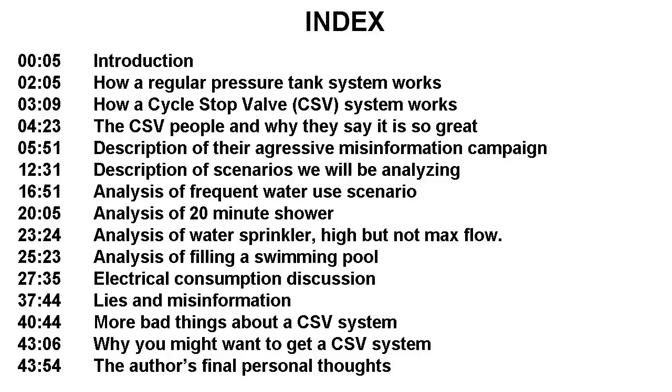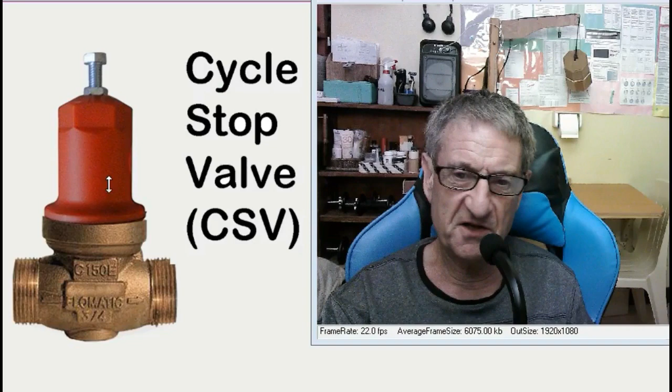This is a piece of equipment that's supposed to go in your pressure tank system. When you have a water system that has a pressure tank and a pump, you're supposed to put this valve in, and it's supposed to help you in many ways. It's supposed to even out the pressure, reduce the number of cycles that the pump goes on and off, save you electricity, save you money, wear and tear on the pump, etc. If you look at the advertising for this product, they make it out like there's no downside to this product and that it's the greatest thing since sliced bread. There's only one problem: this is actually a bad product. It really doesn't do any of the things they say it does.

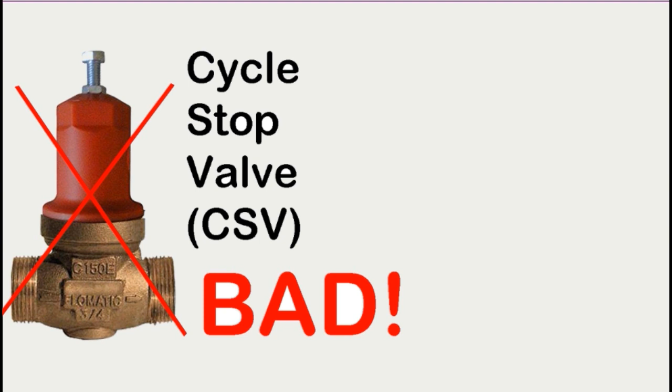The information they give is very misleading, and I'm going to prove to you today why it's a bad product. So here's what I'm going to do in this video. First, I'm going to give you a quick overview of what it is and how it works, so that you know what I'm talking about. Then I'm going to tell you what the promoters of this product say it does for you. And then I'm going to show you how they promote this product with both misinformation and disinformation, pretty close to downright lies. Then I'm going to show you in more detail how it works and what exactly it does. Finally, I'll explain why it is a bad product, why it does not do the things they say it does, and why it will cost you money if you buy this product. Not only the cost of the product itself, but it will actually cost you money in other ways. It is just not a good product, and I'm going to show you why.

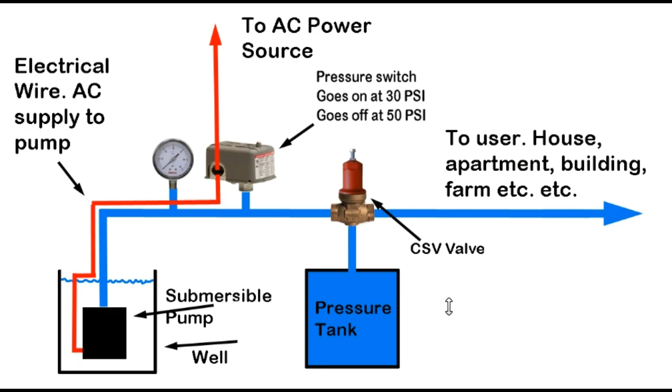And you see him everywhere. When there's a video about a water tank system, he'll come on in the comments and say, what you really need to solve your problem is a cycle stop valve. And he has a bunch of videos where he promotes these things ruthlessly and non-stop. I mean, tooth and nail, he will promote these things.

And if anybody puts out a comment that's negative, he will refute that comment. Even if his refute is wrong, he'll swamp you in technical information and gobbledygook so that you don't really know what's right or wrong. And he'll try to convince you that if anybody says anything bad about this product, they're wrong. And this is the greatest product in the world, and that you better not criticize this product because this product is just fantastic.

Okay, so I'm going to give you some examples of this.

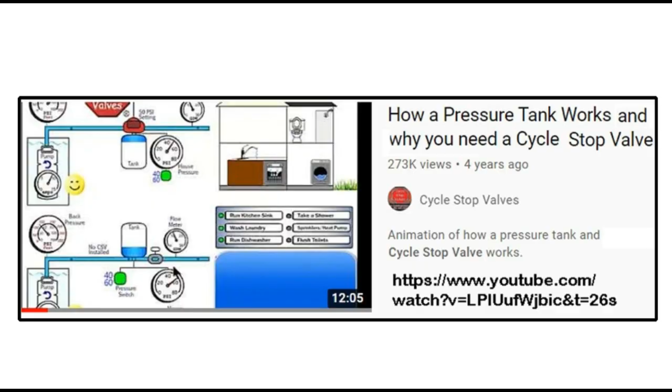After I posted a comment on his site explaining that sometimes the cycle stop valve doesn't reduce cycles but actually increases cycles, and said he should explain that, his answer was: I am not glossing over anything, as there is really no downside to the CSV. You just don't understand the principle. Well, there are downsides to the CSV, and you're wrong.

I do understand the principle. I understand it perfectly. And in fact, I understand it so perfectly that I'm going to be able to refute everything you say.

Let's go on to another quote from this guy called Duval Doder. He put this comment on the video, a very long comment with great detail, explaining why his product doesn't do what it's supposed to do, and how this product is actually going to cost you a lot of money. And then this was his answer to Duval Doder, if I'm pronouncing it right.

Pump and motor manufacturers blacklisted the CSV as a disruptive product in 1994. That means the CSV works so well it would put pump and tank companies out of business. So they will do or say anything to keep you from trying one.

I don't think you know as much as the engineers from Goulds or Grundfos or Pentair or Berkeley. They all know the CSV is the best thing for any pump system, which is why they want you to keep letting your pump cycle itself to death with your big 300-liter tank. Almost 30 years and 1 million CSV customers are not wrong. You are. So give me a break.

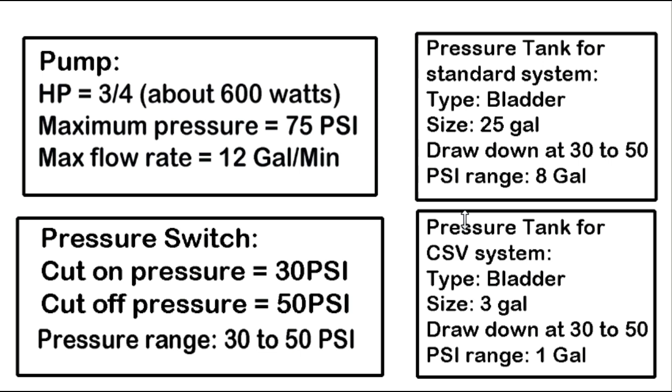Okay, what I'm going to do now is compare the performance of a non-CSV system, that is a normal system, to a CSV, that is a cycle stop valve system, in 4 different scenarios as follows.

Scenario 1, using the water frequently for short periods of time. Example: washing hands, flushing toilet, etc. Scenario 2, using the water for a long time but with a low flow rate. Example of this is a long shower. Scenario 3, using the water for a long time with a faster flow rate that is still less than the pump's capacity. Example, running a sprinkler. So the pump is pushing the water fast out the sprinkler, but not as fast as it could. There's still some reserve capacity to the pump.

Scenario 4, using the water for a long time with a flow rate that uses the full capacity of the pump. An example of this might be filling a swimming pool, where you have a large hose and you turn the water on full to fill the pool.

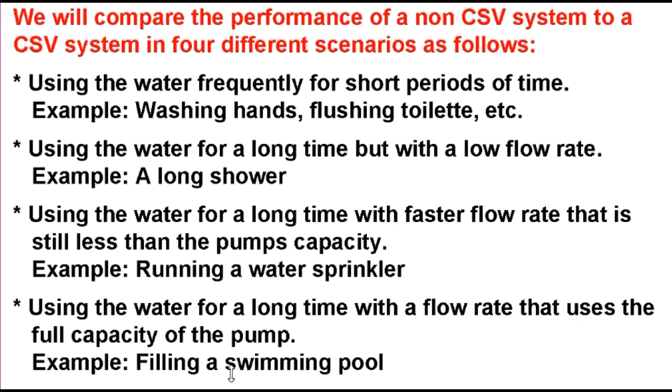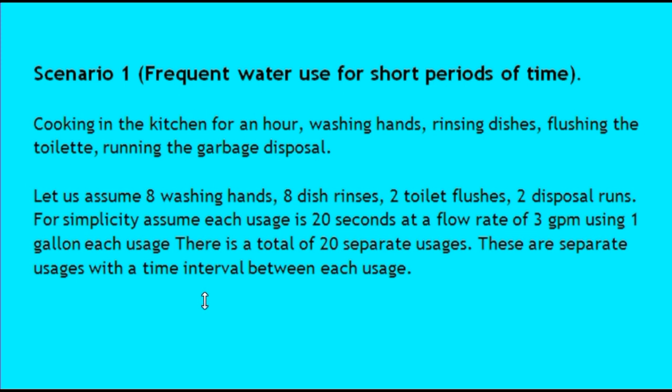Okay, so here is scenario 1, frequent water use for short periods of time. This is, for example, you're cooking in the kitchen for an hour, washing your hands, rinsing a dish here and there, flushing the toilet, running the garbage disposal. Let's assume we wash our hands 8 times, rinse a dish 8 times, flush the toilet twice, and use the garbage disposal twice. For simplicity, we'll assume each usage is 20 seconds at a flow rate of 3 gallons per minute, which uses 1 gallon for each usage. There's a total of 20 separate usages of the water, turning on the water 20 separate times, each with a time interval between uses.

So let's look at the math here. Now, I'm not going to go into the details of all the math. If you're interested or into this kind of stuff, you can check my math and make sure it's right, but I'll just sort of gloss over it quickly.

In the first scenario, you're using the water 20 times, but you're drawing off a large pressure tank with an 8-gallon drawdown. So the pump isn't turning on each time. In fact, as it turns out, the pump will go on 3 times, for a total time of 2 minutes. But with a CSV system, every time you use water, the pump will go on, every single time. And when it refills the small tank, it will refill it at a slow rate, because the CSV valve will prevent the small tank from filling up quickly. So that's the math of the CSV system—please check it in detail if you want.

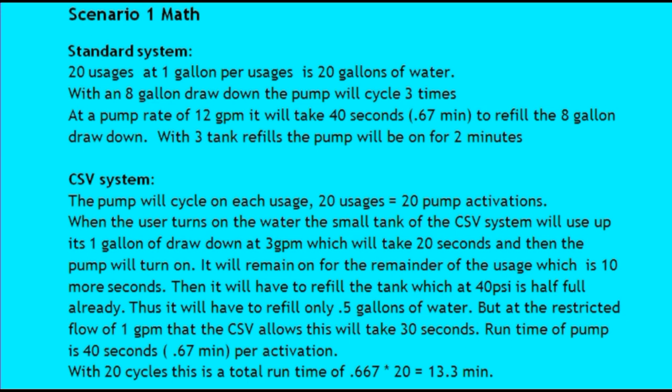Now let's look at the recap of scenario 1. Let's look at the number of cycles and the number of times the pump turns on. For the standard system, it will turn on 3 times. But for the CSV system, it will turn on 20 times. So Cycle Stop Valve Man, CSV Man, is trying to tell you that you'll save cycles.

And you will in some cases, like when you're using long periods of water. But when you're using short periods of time, you don't save cycles, you waste many, many cycles.

Let's look at the runtime in our scenario. The runtime for the standard system of the pump is only 2 minutes. But for the CSV system, it's 13.3 minutes. So you're using 6.65 times more electricity. Note also that the CSV is supposed to provide constant pressure, and it does if you're using it for a long period of time.

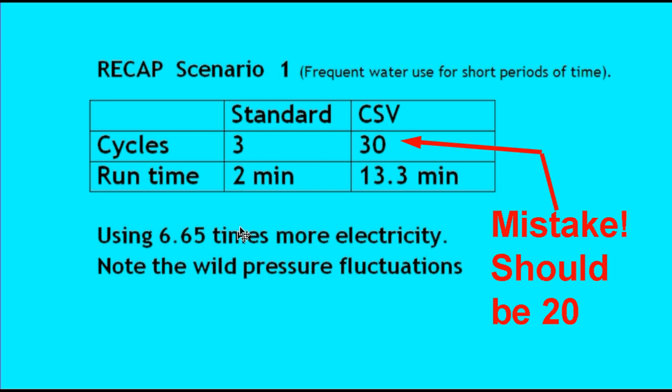But when you're using it for a short period of time, you actually get wild fluctuations, because you turn on the water, and first you're starting at the high of 50 pounds, but because you have a small tank, it quickly goes down to 30 pounds. Then the pump goes on, and it shoots back up to 40 pounds, and finally it will stabilize at 40 pounds of pressure. So you certainly don't get constant pressure in this particular scenario.

Okay, so now let's look at scenario 2, long usage with a low flow rate. An example of this is a 20-minute shower, and a typical shower has a flow rate of 2 gallons per minute. In this case, a total of 40 gallons will be used.

I'm not going to go into the details of all the math, but basically with a standard system, you'll be drawing off the pressure tank, and the system will go on 5 times. Each time it goes on, it will run for 0.8 minutes, and the pump will run for a total of 4 minutes. It will run 5 times for a total of 4 minutes.

Now with the CSV system, it will go on just once. It will stay on for the total of 20 minutes. How can this be? Because the pump is fast, but the CSV valve will stifle the pump, it will put back pressure on the pump, so the pump will only be able to pump at a slow rate, and it will stay on for the full 20 minutes of the shower, never cycling.

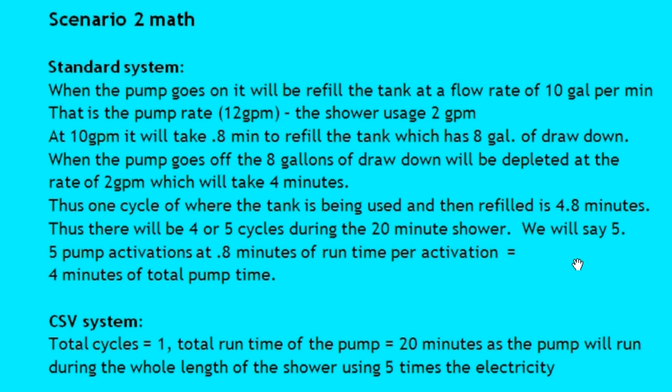The good thing is that you will get constant pressure of 40 pounds during the total length of your shower. When we look at this, we'll see that the number of cycles for the standard system is 5, and for the CSV it's 1, and you are getting constant pressure, so that's the good thing about this. But the runtime of the pump for the standard system is 4 minutes, and for the CSV it's 20 minutes. So it uses 5 times more electricity.

Now the CSV man disputes this case. He says it doesn't use 5 times as much electricity, and he presents a case. And his case is wrong, it's just completely false. Later I will debunk the CSV man's argument.

There's one other thing I want to say about this scenario, and that is this: the CSV man says that the CSV is good in this situation because it will only cycle once, where the standard system will cycle 5 times. And cycling 5 times puts 5 times as much stress on the pump as cycling just once. But the other thing to look at is that with the CSV, the pump is running 5 times as long as it is with the standard system.

So is it clear that running 5 times for a short period of time is more stress than running once for 5 times longer? I don't think that's clear. And when they talk about a pump's life, they talk about the total amount of time that the pump is on, usually the duty cycle. They don't usually talk about how many times the pump goes on and off. So I think you'd have to do some kind of study. I actually looked for this on the internet and I came up empty.

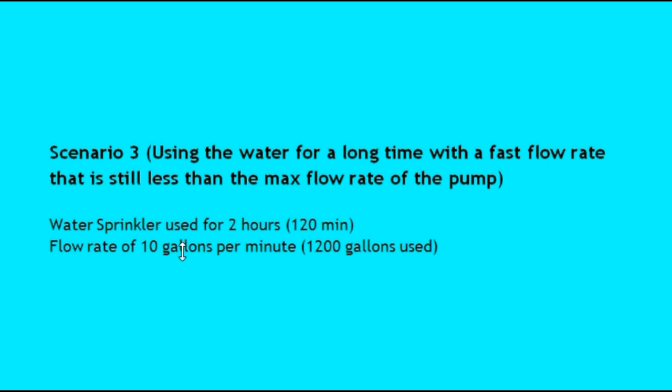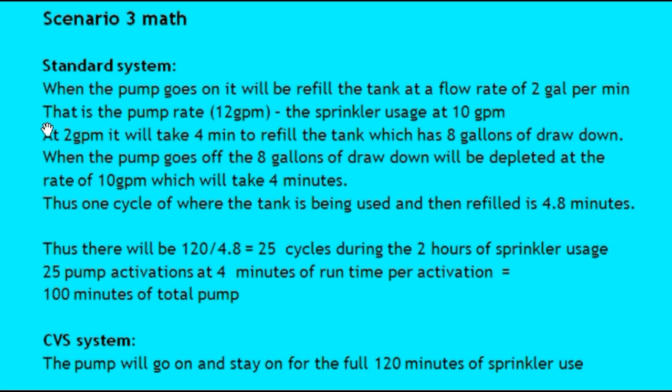Again, I'm not going to go over all the math, please feel free to check it and let me know if there's anything wrong. But this math actually favors the CSV system — it's the only situation where it does. So let's look at the recap.

For the standard system, it will cycle 25 times. For the CSV system, only once. For the standard system, the runtime will be 100 minutes, and for the CSV, it will run the whole time, 120 minutes.

So finally, in this particular very specialized situation, I will admit that the CSV is saving you money and doing a good thing, because it's reducing the number of cycles from 25 to 1, and it only has a little bit more runtime. In fact, it may use the same amount of electricity or even less, because there's a bit of a surge each time you start the pump. So I'm going to admit that in this case, the CSV valve is good.

But remember, this is a very specialized situation where you're running it for a long time and close to the full capacity of the pump, but not the full capacity of the pump.

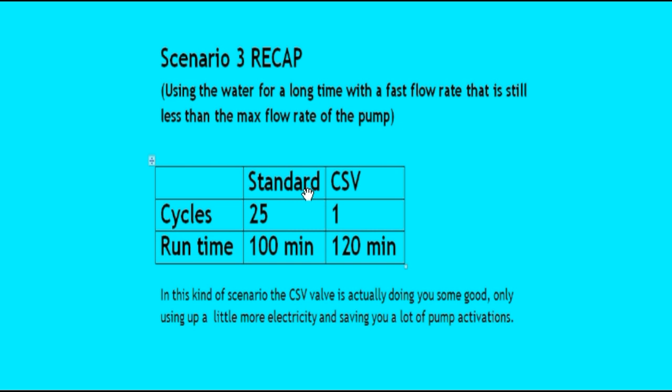In scenario 4, we have long water usage using the full maximum capacity of the pump. An example is filling a swimming pool. If the pool is 20 feet long, 10 feet wide, and 4 feet deep, there would be 800 cubic feet of water, about 6,000 gallons. If you're using the full capacity of the pump — a big hose going directly into the pool at 12 gallons per minute, the full rate of the pump — it will take 6,000 divided by 12 equals 500 minutes, equals 8.3 hours to fill the pool.

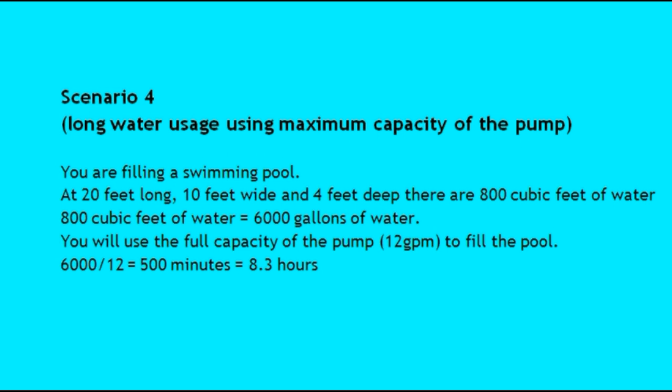So now let's look at the math here. What happens with a standard system? With a standard system, the pump actually never goes off — it's on the whole time.

This is because all the water is going into the pool, and none of it is going back into the pressure tank. The pressure tank never fills up, so the pressure never achieves the 50 pound cutoff, and the pump will run for the whole 8.3 hours.

And with the CSV system, it's exactly the same. So in this situation, using the full capacity of the pump, the standard system and the CSV system behave exactly the same.

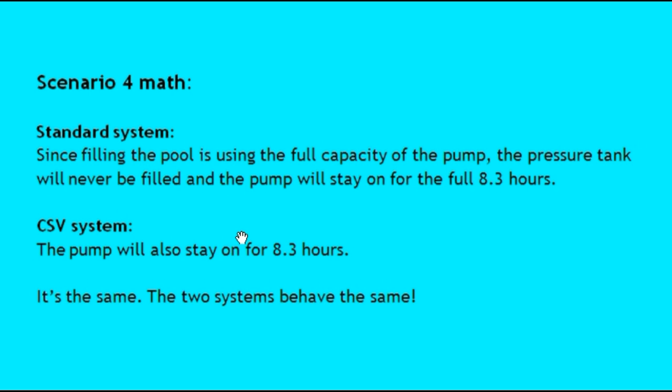I want to point out that in this situation, the CSV man is telling a bold-faced lie. He says that when you're using the full capacity of the pump, the standard system will still cycle — even if you turn on every faucet in your house. He says that in one of his videos, and it's a complete lie. If you're using a lot of water and exceeding the capacity of the pump, the pump will never go off, and the two systems are equivalent.

So let's revisit scenario 2, which is a long shower at a low flow rate. What I said is that it uses 5 times more electricity because it's on for 20 minutes with the CSV, rather than 4 minutes with the regular standard system.

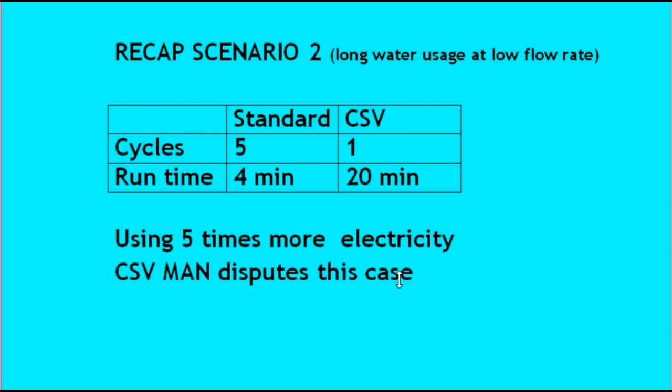But the CSV man disputes this case. He disputes it because he says when the pump is restricted, when the flow is decreased, the electricity rate goes down and the pump uses less power. In a video he made promoting the CSV, he says when you restrict the flow of a pump, the power usage goes down. And while he admits some pumps are better than others, he says the pump in this simulation uses 50% less power when severely restricted.

So what does he mean, this simulation? You can put any numbers you want in a simulation, that's what a simulation is. Does it reflect a real-world pump, or does it not reflect a real-world pump?

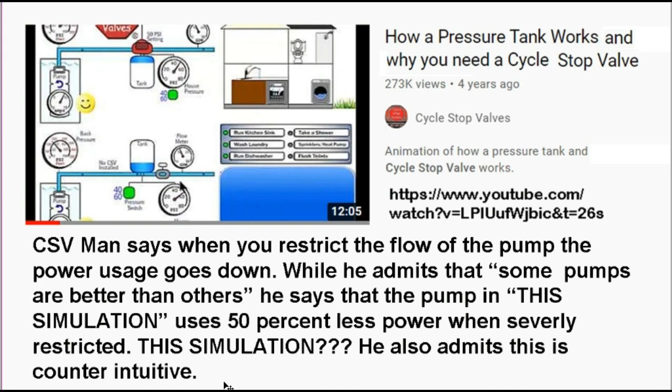He also admits that this is counterintuitive, and yes, it is. Let me talk about that for a second. Why should a restricted motor use less amps?

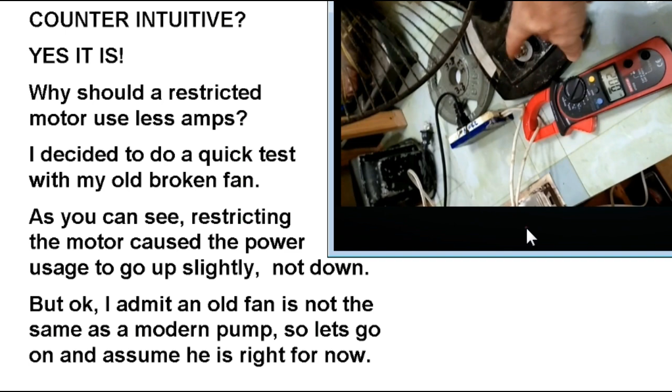So I decided to do a quick test with my old broken down fan and an amp meter that I have. As you can see, restricting the motor caused the power usage to go up slightly, not down.

But okay, I admit an old fan is not the same as a modern pump. So let's go on and assume he is right for now, although later I'm going to question him again, as you'll see.

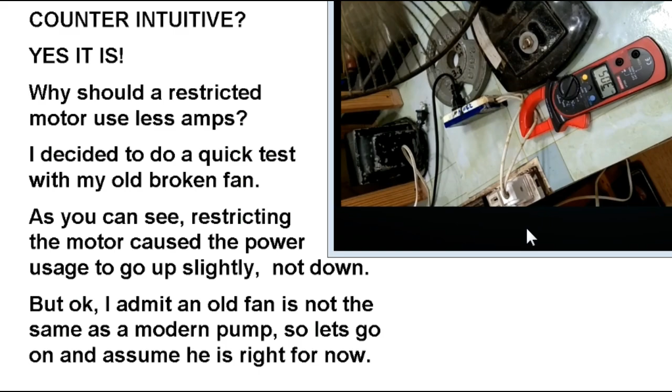Okay, so let's revisit scenario 2 again, and let's assume the CSV man is right, that it does use 50% less electricity in the restricted state. If we look at this example where originally I said it uses 5 times more electricity, even if he's correct and the pump uses half the amount of electricity while running 5 times as long, it would still use 2.5 times more electricity in this scenario. I'm going to prove later that he's not right, but even if he was, it would still be 2.5 times more.

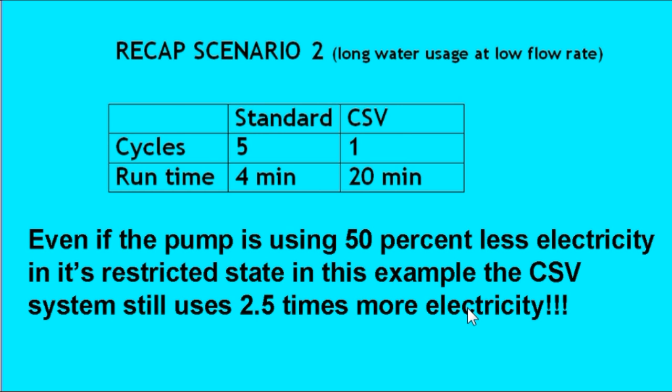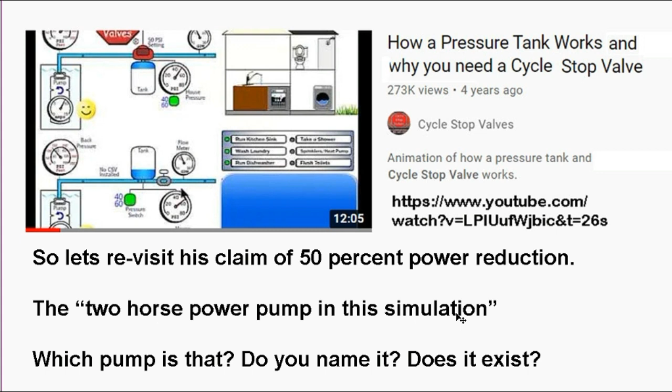So let's revisit his claim of 50% power reduction. When he talks about this simulation, he says 'the 2 horsepower pump in this simulation.' Oh, which pump is that? Does he name it? Does that pump exist? Well, I guess he tried to solve that problem.

Now, as the flow rate goes down, that happens because there's back pressure in the system. Imagine it's pumping water uphill, and the water pushing back is like the resistance, the back pressure, sometimes called the head height in feet. It's like pumping so many feet of water up a hill. As the back pressure goes up, the flow rate goes down, and eventually the pressure is so high that the flow rate becomes zero.

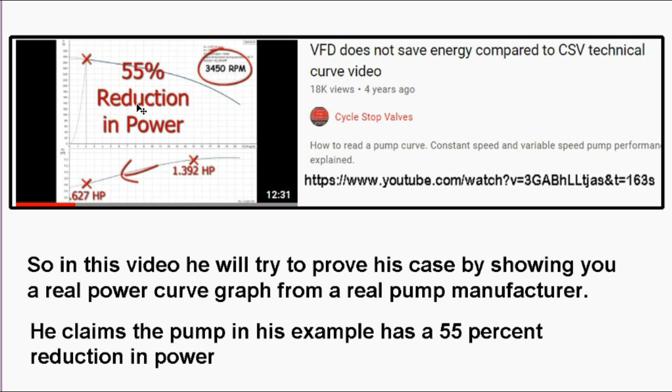The first thing I want to say is that he claimed a 55% reduction. This isn't a 55% reduction, it's a 45% reduction. What he's saying is that the pump is using 55% of the power it would use with no flow restriction, so that's only a 45% reduction. If you go back to his previous video, he says 55% reduction in power. Well, that's a lie, even according to the slide he's showing. It's only a 45% reduction. Okay, but 45% is still good.

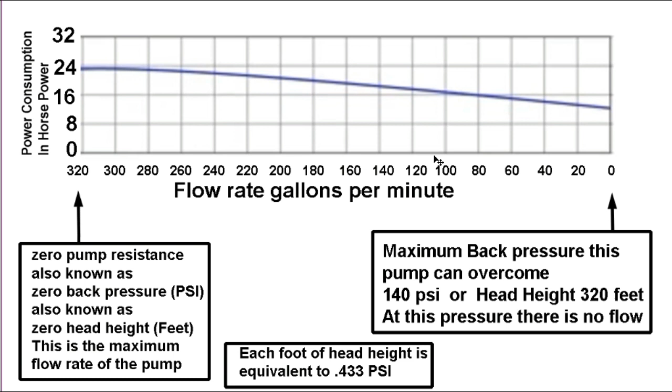So what I decided is, what about a normal pump? I have a pump - this is my pump. It's a cheap pump, only 1/2 horsepower. I got it from China, and it's been running my system for 4 years without any problem. I decided to do the test myself because I have an amp meter, and I can test it to see if there's any truth to this reduction in power as the flow rate is decreased. So I'll show you this video that I took now.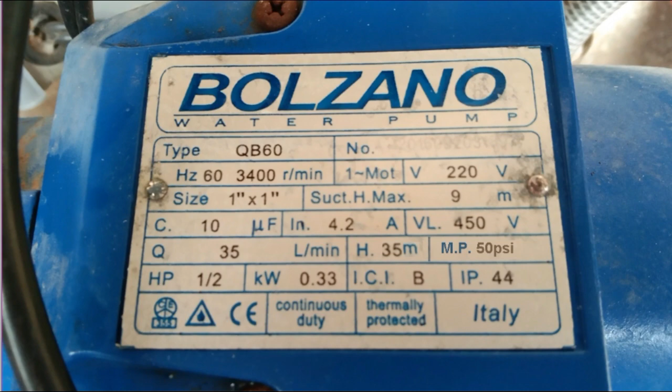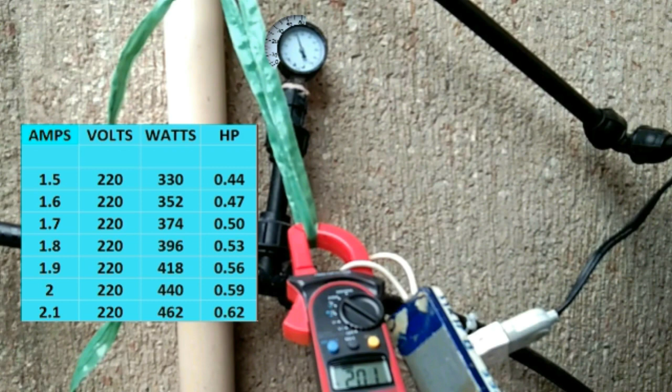Okay, let's continue. The initial pressure in the tank is only about 5 pounds, and as you can see it started at about 1.5 amps, slowly going up as the pressure increases. This is kind of boring, so I'll skip a little. Now the pressure is around 30 psi, climbing toward its final destination of about 45 psi, and the amperage is continuing to climb, finally cutting off at around 2 amps, whereas it started at 1.5 amps. So as the pressure goes up and the flow is restricted, the amperage actually goes up - the power consumption goes up, not down, as the CSV man claimed. I think he knew that, and I think it's a bold-faced lie.

Okay, so in the last part of this video, I'm going to summarize my thoughts and things that I think are wrong with his information. So let me first start with this.

This Waterworld ad has a bold-faced lie in it. It says there are still disbelievers who can't fathom the simplicity of a mechanical valve that can deliver constant water pressure with equal efficiency from small flows to large flows. That's a bold-faced lie. It doesn't deliver equal efficiency under all situations. In many situations, the efficiency is very badly compromised.

Let's go on to bold-faced lie number 2. In one of his promotional videos, he says, with a regular system, even if you open up all the taps to the house, your pump will keep cycling. That's not true. With a normal pump that's sized right, if you open up all the taps, the water will be used so fast that the pump will not supply enough water to make the pressure go up and fill the tank. So the tank will never fill up completely, and the system will never go off. It will not keep cycling if you're using a lot of water. That's lie number 2.

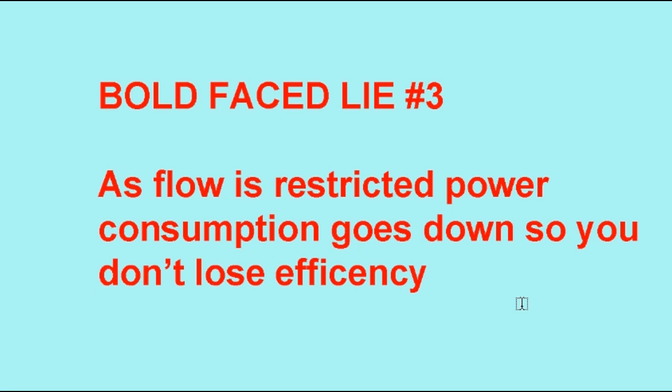Here are some misleading statements. A CSV delivers constant pressure—okay, it does in the long run. But in the short run, it delivers anything but constant pressure, as the pressure will first surge down and then surge up before it stabilizes.

Another misleading statement is that CSVs reduce the number of pump cycles. It's not clear at all that it reduces the number of cycles. In some scenarios it may, if you're using water for long periods of time. But in a normal household where you're always washing your hands or flushing the toilet, I'll bet anything the number of cycles actually goes up. For the average person, the number of cycles is going to go way up when you use a CSV valve.

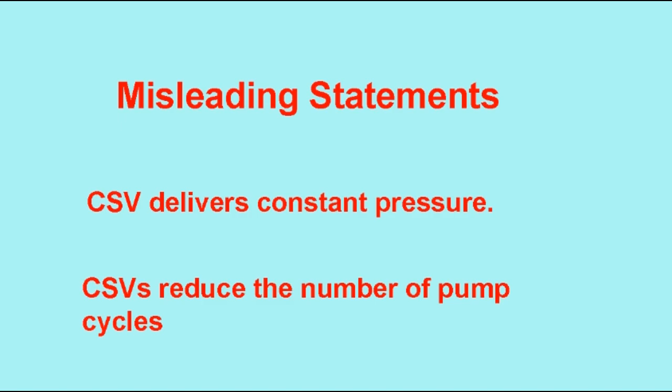Here are some more bad things about a CSV valve. As I mentioned, there are wild pressure fluctuations when the water is first turned on. This is because it's a very small tank that will first empty quickly and then has to fill. The pump will come on and fill it up quickly to the halfway point, when finally the CSV valve will steady the pressure. But before it steadies the pressure, there'll be a wild fluctuation.

Another thing about the CSV system is if you get a powerful pump, you will be punished badly. If you get a pump more powerful than you need with a regular system, maybe you'll waste some money buying it, but otherwise it won't really hurt you—it will just fill the tank quicker and go off quicker.

But if you have a CSV system and you buy a more powerful pump, it will hurt you badly, because the CSV system will hold back the pump and not let it pump as much as it wants to. It will restrict the flow to a very small level, resulting in very bad efficiency. So the bigger and more powerful your pump, the worse efficiency you'll get. In fact, if you really want a CSV valve system, you're probably better off with a small motor.

Sometimes he says that if you get a big tank with a CSV, it will solve some of these problems. Well, not really. It will solve the problem of water going on and off every time you use it for short runs like washing your hands. But for most cases, if you have a very big tank, it will behave like a regular system, unless you have a very long run like a sprinkler system.

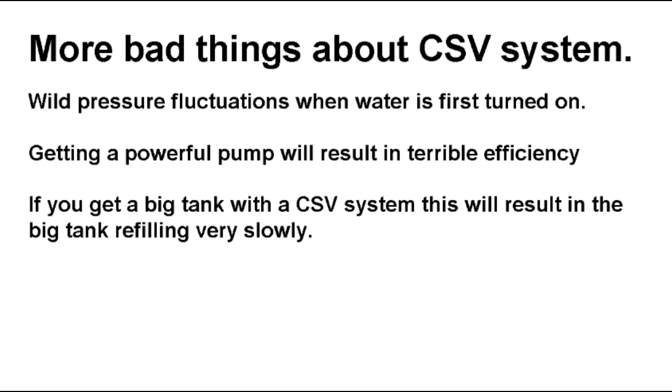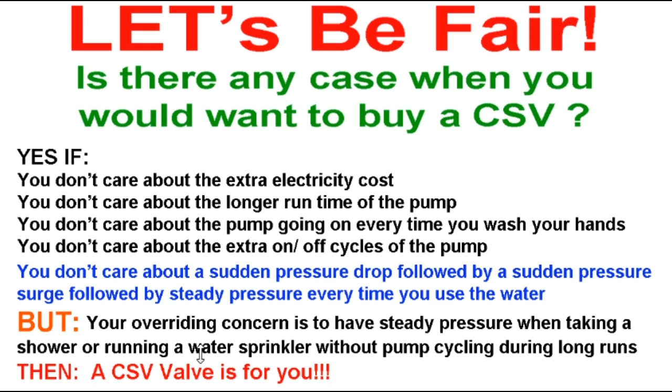So let's be fair. Is there any case when you would want to buy a CSV valve? Well, I guess yes. If you don't care about the extra electrical cost, if you don't care about the longer runtime of the pump, if you don't care about the pump going on every time you wash your hands, if you don't care about the extra on-off cycles, if you don't care about a sudden pressure drop followed by a surge, followed by steady pressure every time you use water — if you don't care about any of those things, but your overriding concern is steady pressure when taking a shower or running a sprinkler without the pump cycling during long runs, then I guess a CSV valve is for you.

Hi, so I thought I'd give some final personal thoughts on this video. I put a lot of time and thought into it. And one of the reasons I made this video is because I took it personally.

I put a comment on one of CSV Man's videos, and as I showed in my presentation, he answered that I just didn't know what I was talking about, that I didn't know the principle. I took that personally because I'm an engineer and I take pride in understanding these kinds of things. And it bothered me that he's trying to sell this product that's really not very good for most people in most situations.

But he has a company and he's trying to make a living. So he floods the market with disinformation, misinformation, and pretty much lies, trying to sell this product so he and his family can make a living. I don't really blame him — more power to him, everybody has the right to try to make a living.

But on the other hand, he's hurting people who are buying this product thinking it's good. He tells them it's a perfect product with no downside, that there's no reason whatsoever not to get a CSV. People are spending money and losing money on electricity and things like that. And there's nobody to tell the truth because they overwhelm everybody with disinformation.